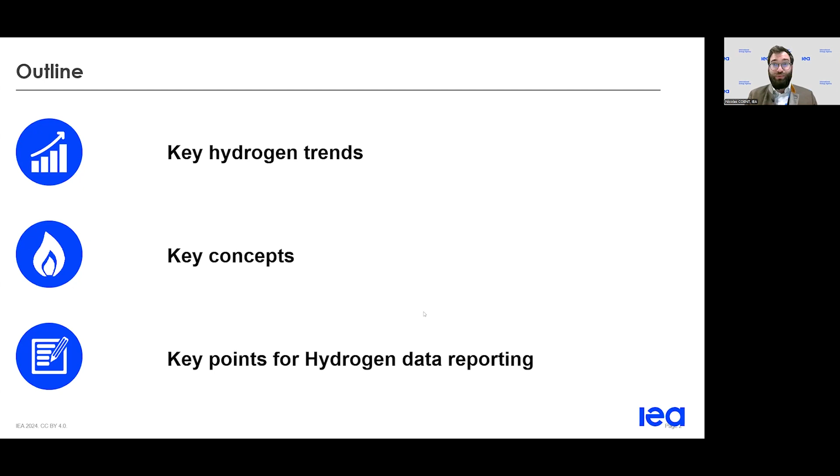Now let's move to the key hydrogen trends. So I guess most of you work in the energy field. You heard about hydrogen in most of the newspapers and the new developments that are happening in many countries. But why is it so important for many people?

Hydrogen is seen as an important option to support the reduction of CO2 emissions for many countries and many industries. And also, it's seen more and more as an enhancement of energy security, especially in Europe after the start of the Russian invasion of Ukraine. The dependency on natural gas was really visible for everyone. So there was a rising need for a new fuel to be used in many industries to replace natural gas.

A lot of countries have pledged to reach net zero or to reduce their CO2 emissions by certain dates, 2030 or 2050. And to reach those, several have already put in place policies that are aimed to increase the capacity in terms of hydrogen production and uses, or also regarding trade and sales of hydrogen around the world.

So we have over 40 countries currently that have policies that are either being developed or already in place to develop those projects. There's also growing international cooperation. We see it mostly in Asia and also in Europe, but there are more and more countries that are working in partnerships to try to develop production, transport, and uses of hydrogen a little bit everywhere.

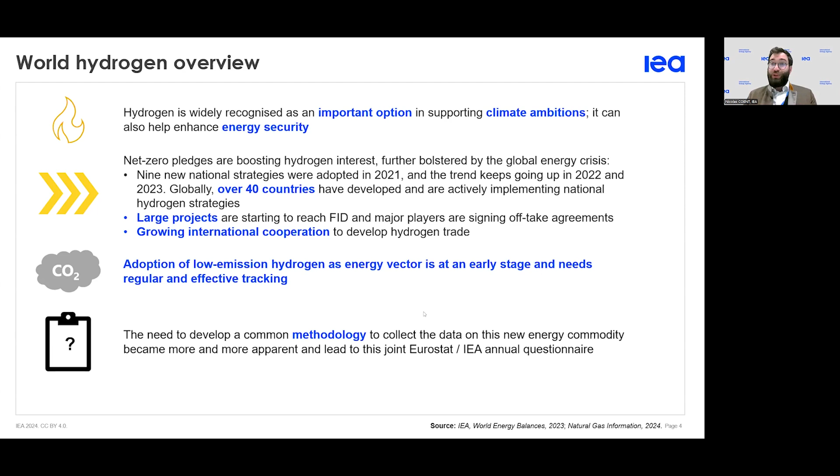And because of all those developments and the variety of technologies and ways to produce or work on hydrogen that have been developed around the world, there was the need to develop a common methodology to collect the data and to analyze what was happening in the world. So hence this new questionnaire that we have been developing.

In terms of rising demand, right now the demand is between 90 to 100 million tons of hydrogen per year in the world, mostly in conventional industries and in refining. Hydrogen is being used in refining to separate the sulfur from the rest of the crude oil and the oil products.

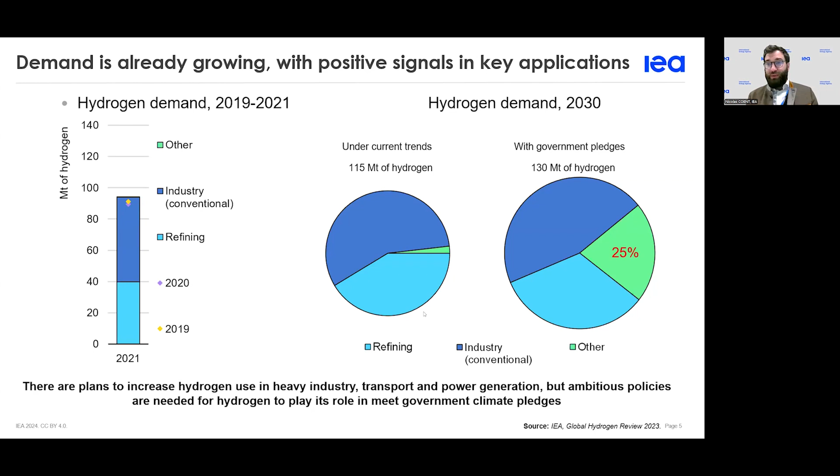And there are a lot of plans already in place that will increase the demand for hydrogen by 2030, including new uses for hydrogen, reaching 130 million tons of hydrogen worldwide, with new uses in transportation, in specific services, and in new systems such as energy storage. We'll see about that later.

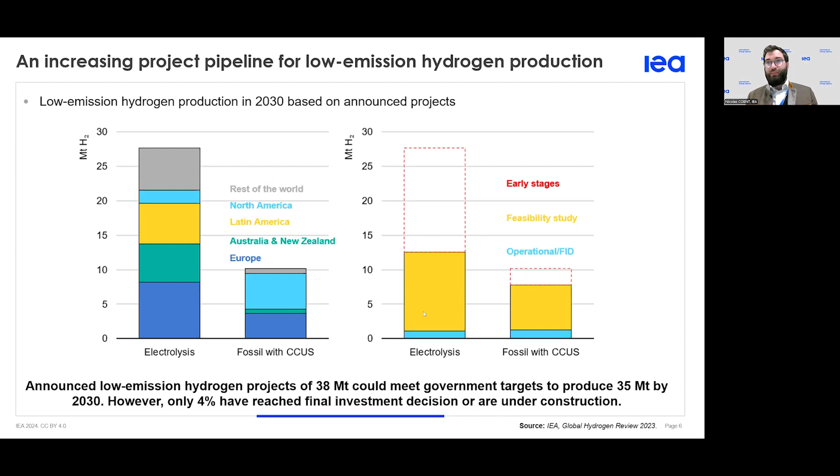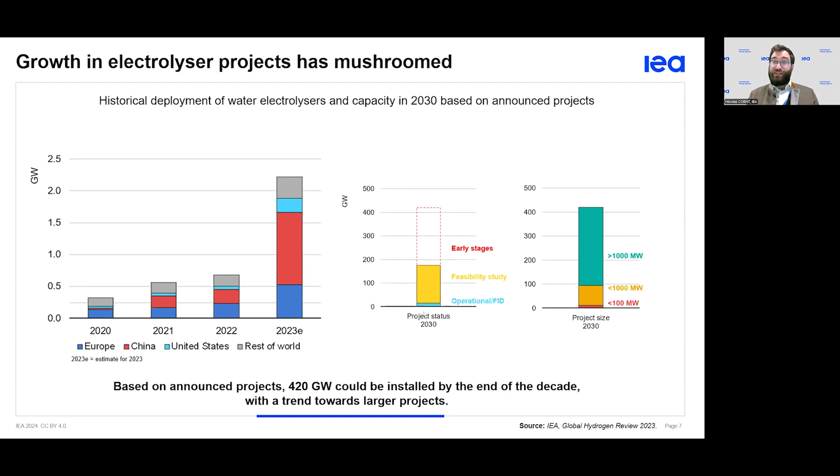And so you see the same graph on the stage at which the projects are right now. And on the far right, you can see also the type of capacities that you were expecting to see. We need much bigger electrolyzers to meet the expected demand if we match the policies that are in place right now.

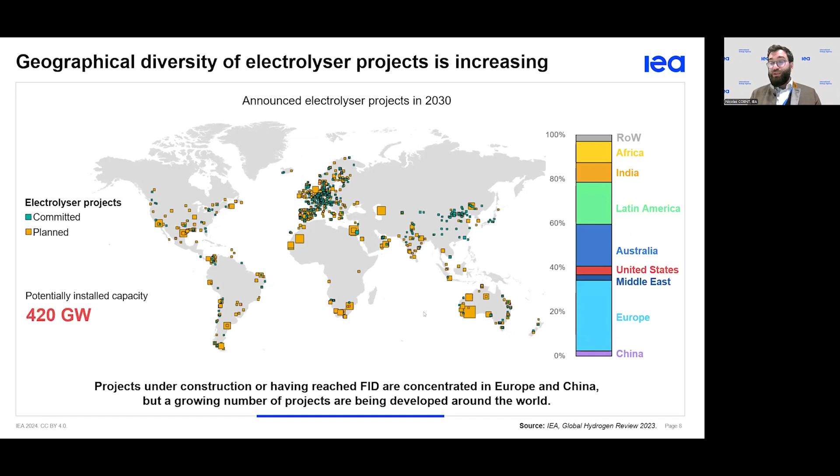And that will be actually developed in many different countries. You can see Morocco has a lot of big projects coming up. You have Egypt, Australia that has a lot of interest also in those parts. So those are expected to be important for every country all around the world.

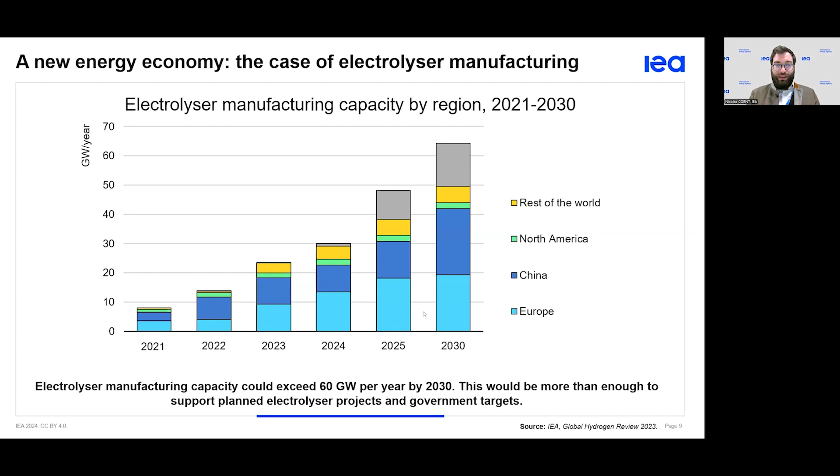I see several questions. Maybe are there any of interest? I think Luca should be in the chat right now. Let me check. Yeah, there are no questions so far. Okay, thanks. So let's keep going, if that's okay.

And finally, to finish with the current trends in hydrogen, there are still several barriers that remain regarding the development of hydrogen. First of all, it's the investment part, because many countries have put in place policies and projects, but the money, the funds are not there yet. And also there are a lot of technical difficulties, especially regarding the transport and facilities to move and manipulate the hydrogen. As we will see in a few seconds, hydrogen is not an easy gas to work with. So we need specific development, specific industries to be put in place so that we can progress on this.

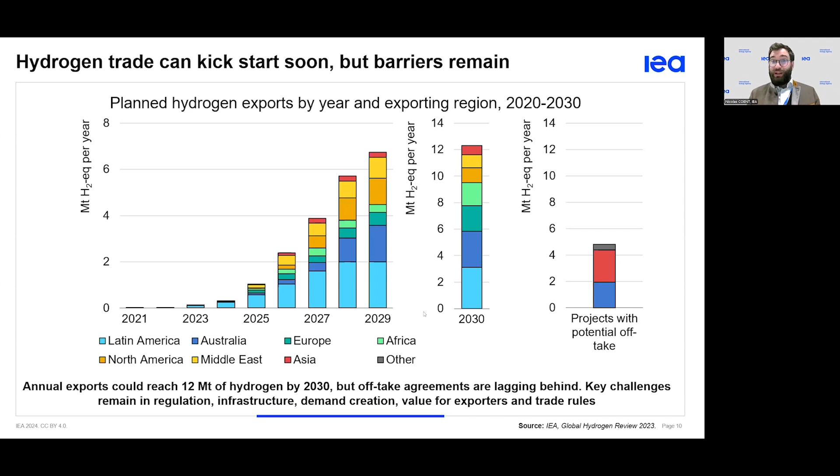So we move to key concepts regarding hydrogen. So hydrogen, or technically it should be dihydrogen, but we use hydrogen to ease life for everyone. It's a gas, it's odorless, non-toxic, but the issue is that it's highly combustible. It is not a very stable gas, and it will react easily with many other elements, especially if you leave it in the air, and you might quickly end up with a big explosion. Hence the difficulties in terms of structures and industries to work with that kind of gas.

In our data, we consider it as a derived or secondary product, like any oil product that you will be hearing about in the coming presentation tomorrow or Wednesday. And to measure it, we use terajoules, like for natural gas and for many gases. It's easier for us to work directly with energy units than with mass or volumes, because those depend on the physical conditions at which you measure it.

If you want an approximation of the calorific value of hydrogen, 140 megajoules per kilogram of gas is roughly a good approach, which, as I put there, is 3 times the energy content of gasoline. So that shows again the potency of this fuel and its interest for many industries.

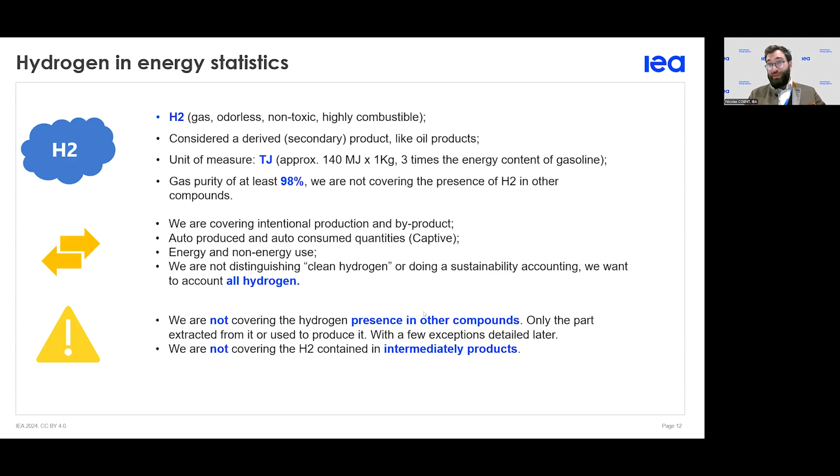And also we avoid in the data talking about clean hydrogen, green hydrogen, pink hydrogen. We do not use those classifications. We talk about the gas because of its chemical composition, and we'll have different flows to identify the sources, and that's what can be used later on. Also, we try to avoid covering hydrogen present in other compounds. If it's present in a specific gas, like natural gas with traces of hydrogen, we do not focus on that. But we have two categories that we will also be covering in this questionnaire because of their interaction with the hydrogen production and industries, and also because of their growing importance potentially in the energy commodity world.

Those are ammonia, which for now is mostly used as a non-energy commodity for fertilizers and specific chemical reactions, but it's totally derived from the hydrogen production lines and can be used as a transport commodity for hydrogen. It is considered in several projects to be used as a transitional state for the hydrogen to be safely shipped from one part to another. And it is something that many people raise interest for, so we try to cover it even if it is mostly for non-energy uses.

And the last part is what we call e-fuels or electrofuels. Those regroup a lot of new developments, new technologies, new types of energy commodity that are not easily defined because there are a lot of different ways. Roughly, the idea is to use hydrogen and specific gases, such as carbon monoxide or dioxide, to create a new fuel. So those are the fuels, the RFNBO that you might see in some places. Sorry, let me see again the definition. It's a mouthful. Renewable liquid and gaseous fuels of non-biological origin.

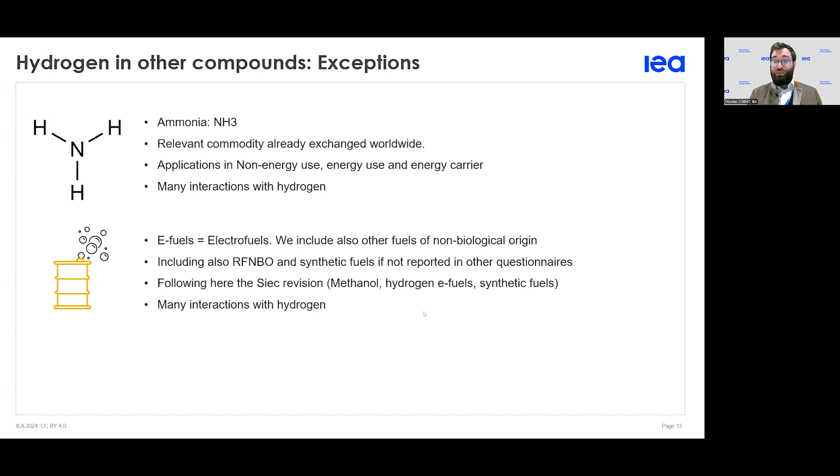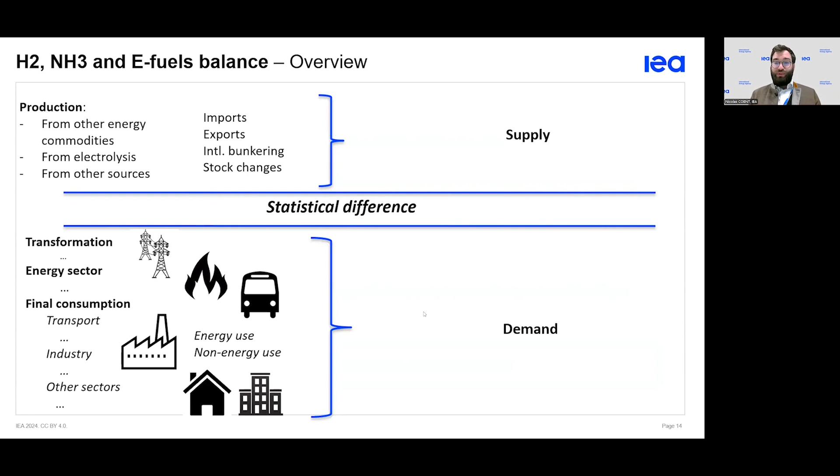In terms of how we will be working for the data in balances, it will roughly follow what is done for the rest of the fuels. So we have a supply part where we include all the production from electrolysis, or the production derived from other energy commodities. That includes, of course, refining, natural gas and also some of the coal activities from which we can extract hydrogen. And you will also have there the trade, the bunkering, and the stock changes for the countries. And then we have the demand part that will include the transformation of hydrogen into other commodities, the consumption within the energy sector, and the final consumption. We'll be covering transport, industries, other sectors, and the non-energy use especially will have far bigger importance than for the rest of the fuels, because of all the interactions you can have with non-energy use sectors.

So in terms of production, we can get hydrogen from different other categories of energy commodities. We can have it from natural gas, oil products, coal, and also renewables and non-renewable waste. So all those technologies we are covering in the questionnaire, and we also distinguish the production from those sources with or without carbon capture and storage, to again try to identify which part is emitting the least possible CO2 in its production, because hydrogen as a green product is very important for a lot of policies and analysis.

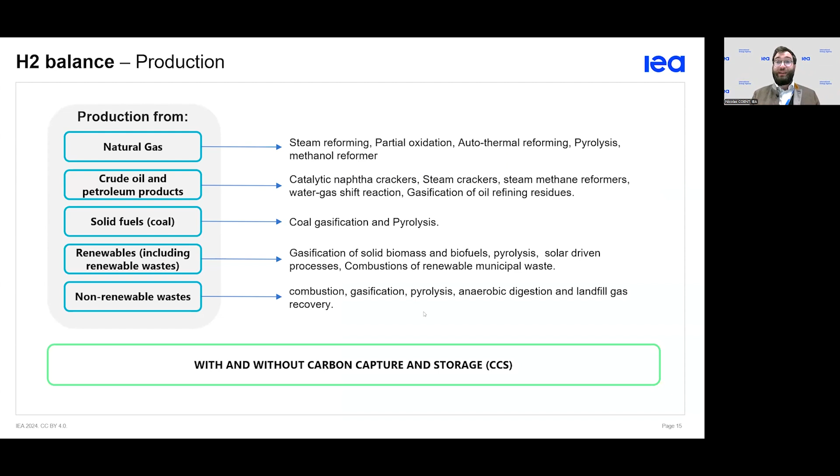In production, we also have the production from electrolysis. As I told you, electricity input into a tank of water. So we distinguish here the sources of electricity used in this process, meaning whether you input grid electricity, or you are directly connected to renewable sources. For example, you have a solar plant producing a lot of electricity and you want to safeguard a bit of it as storage; you can have an electrolyzer to produce hydrogen, which could be used as storage of that energy for later when the demand is actually matching. So we distinguish here the renewables, the nuclear, the fossil fuel sources that are directly connected to the electrolyzers, and if you have specific electricity production that we do not cover, we have an other category.

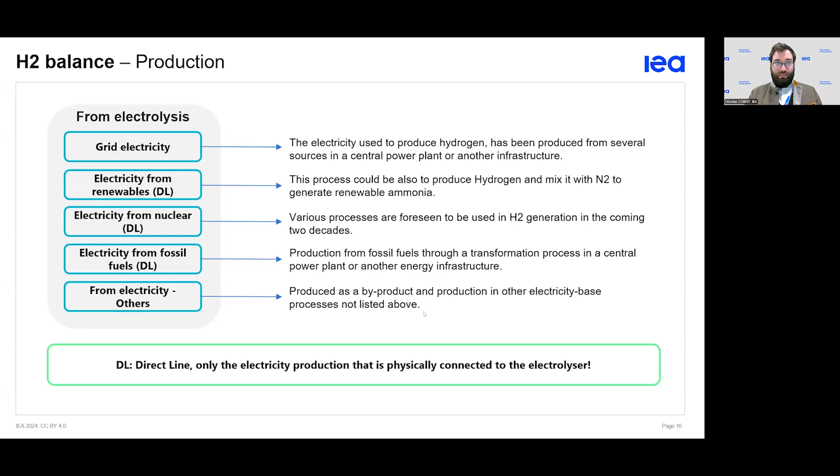Yeah. So for ammonia and for e-fuels, that will be closer to what you have in the rest of the annual questionnaires. So we'll be reporting the quantities produced from other energy sources, and some specific flows that could be matching for them. And keeping in mind that, for example, in case of ammonia, 80% of it comes from natural gas. So that's where we expect to see, of course, the biggest share.

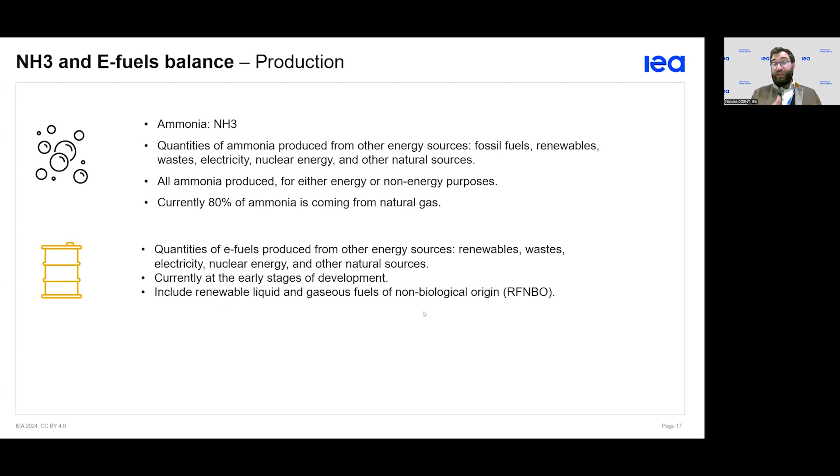We have trade. So for now, the trade of hydrogen as a gas is, of course, currently done mostly by pipelines, so injected or blended with other gases. And also we have other transportation systems, such as the transformation into ammonia and methylcyclohexane, that can be used as chemical transport vectors for the gas to go then somewhere else. Of course, if you have transformation losses, we also need to know, because that's accountability and also understanding what's happening in terms of transport and the efficiency of transport.

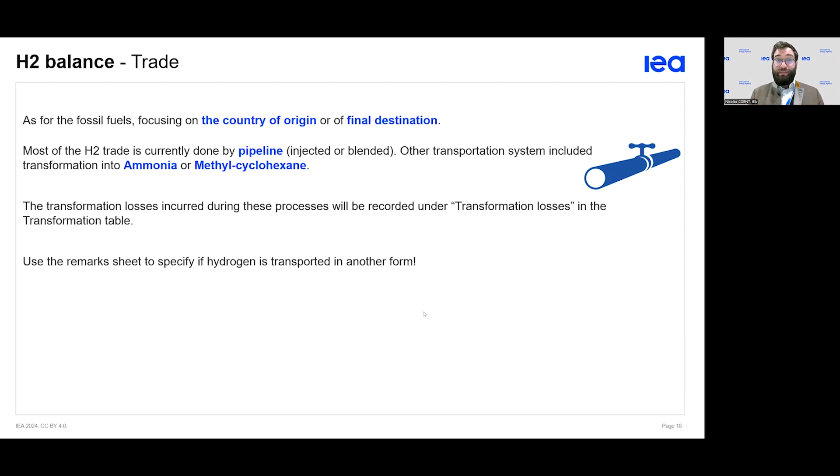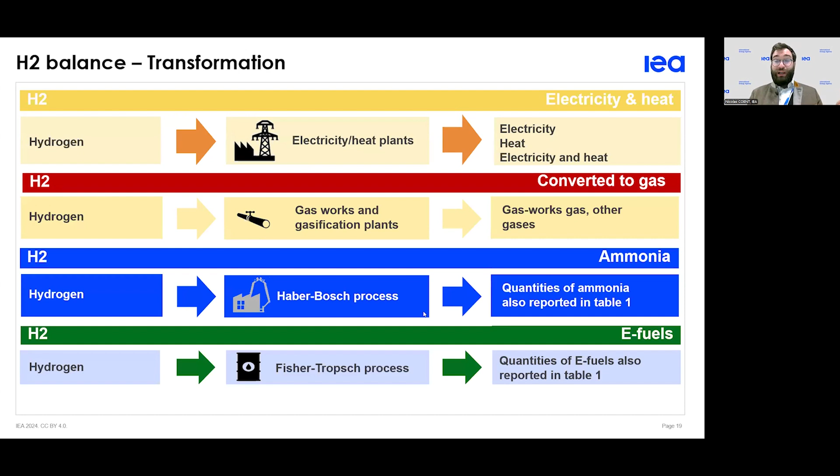And now we leave the supply part to go to the transformation. So hydrogen can be used as a combustible to produce electricity. Also, it can be used in gas works and gasification plants to be converted into gas. And also, as we saw, it can be used to produce ammonia or e-fuels. But all of those are covered in the transformation part in the annual questionnaire. Also, in the transformation part, we have a big part regarding refinery outputs, because hydrogen is mostly produced as refinery byproducts, and it is totally linked to those activities.

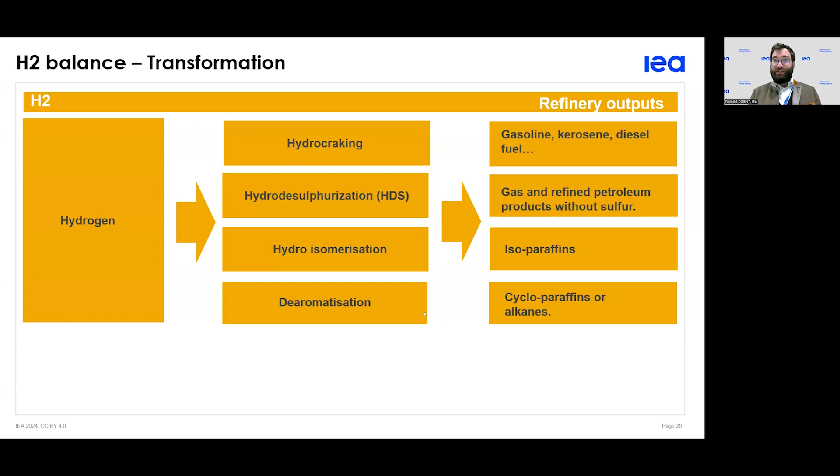All right, so for the last part, we go quickly through the current stage of the annual questionnaire. Again, this is a work in development. The first version is online, and we collect on a voluntary basis the data that our contacts can provide. And it's divided in 6 tables. So the first part covers the supply with production and stocks. The second part, tables 3 and 4, are for consumption in transformation, energy sector own use, and final consumption. We have a specific table for trade, and finally the infrastructure with some capacities.

So this questionnaire is deeply linked with the other annual questionnaires that we publish. So what we have in the indigenous production values should match what we have in some inputs to transformation in the other questionnaires. For example, the production from refineries should be matching the other hydrocarbons produced in the oil questionnaire. Or we could have the input of electricity into electrolysis that should match between the electricity questionnaire and the hydrogen questionnaire. Also, we should have a connection and matching values between the transformation sectors and the oil questionnaire for the refining end.

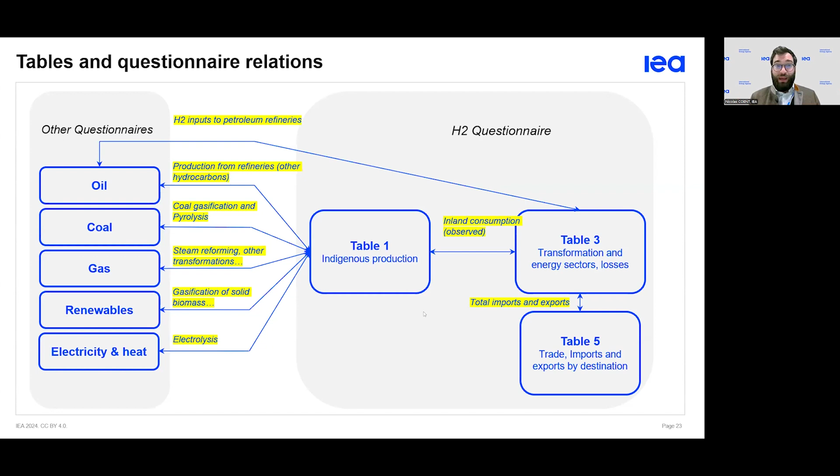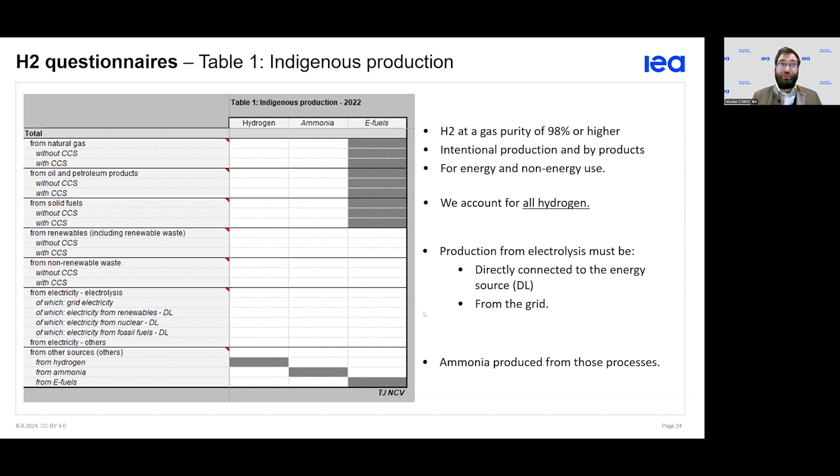And here is how it looks for now. So, as I was describing, you have different lines by type of production. So you have from natural gas without carbon capture and storage, or with carbon capture and storage, and the detail for the electrolysis also. And we have a last part from other sources that should cover any new technologies that we did not foresee when we were preparing this annual questionnaire.

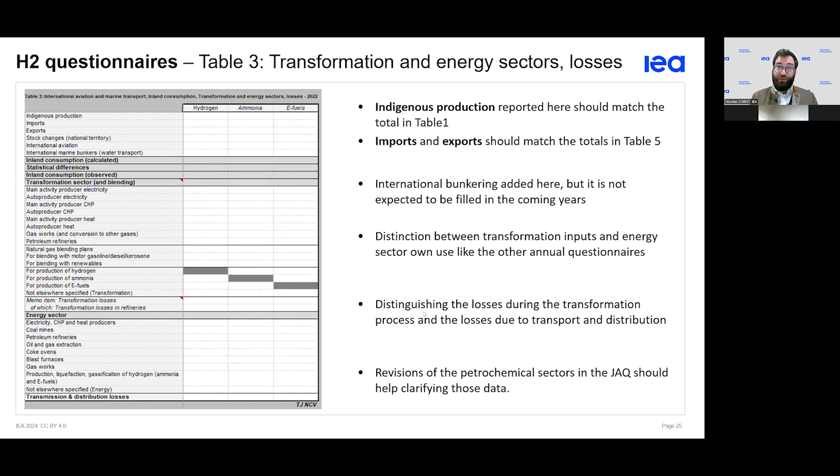You have then here a view of the transformation and energy sector own use. It really looks like what you will see in many other annual questionnaires, so it's not worth spending too much time here. Only one part is a little bit different: we cover the transformation losses, the transformation losses specifically in the refineries, and also the transport losses. So those are 3 types of losses that we try to cover here to really have a view on what's happening and where the losses are. Final consumption, so we distinguish, as I told you, energy and non-energy uses, and we try to have a global view of what is happening here. And those are for the 3 main categories, so hydrogen, ammonia, and e-fuel.

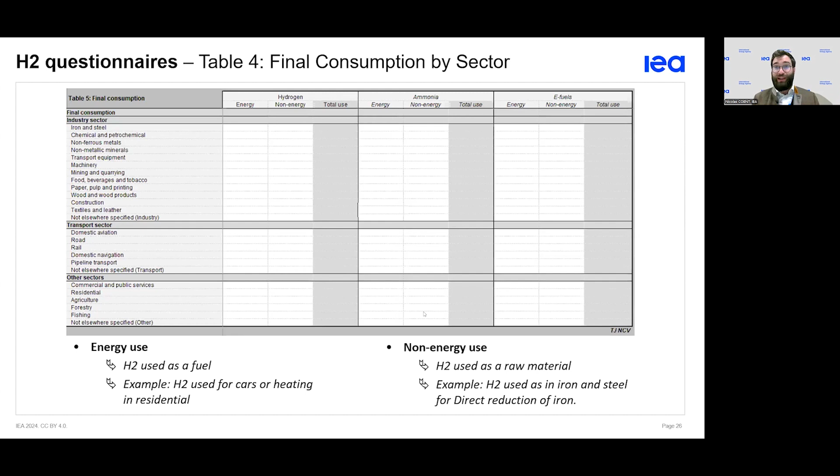We don't have a slide for the last part on trade, because it's just the amount that is exported from one part to the other. Just note that as for any fossil fuel, we focus on the ultimate destination or the first point of origin. We do not cover transit of the energy commodity in between countries to keep things clean. And also we have the table on capacities that includes the electric capacity of the electrolyzers and the nameplate capacities for production of hydrogen in specific plants. So just to have a view on what are the efficiency and the load of those plants once they are running. You will see those slides also.

We have a lot of different things that are available for free on our website. Please have a look. And as I told you, if you are curious, the questionnaire is also available. You can go and test it and tell us if you have data. I'm always happy to receive them and try to make sense of them.